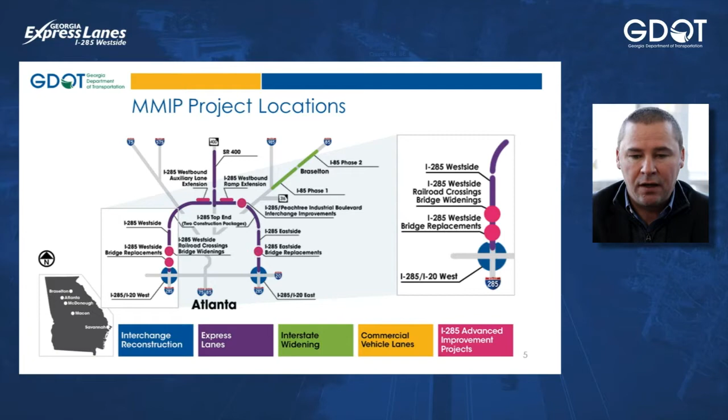Now, the Georgia Express Lanes are not unique to Georgia. We do have a history of those. Our first project, I-85, was opened several years ago, and we've opened several more in the past few years as well.

So the history started back in 2000 with our HOV system plan. We wanted to find ways to manage and mitigate congestion on our most congested corridors, and we thought the HOV system would work. But we found during that study that most folks still do not want to get out of their cars or carpool.

So what we did was move forward with a study on I-285 in 2006 that looked at alternatives, including transit, bus rapid transit, as well as general purpose widening and express lanes. And out of that, in 2007, the Atlanta Regional Commission, as well as the Georgia DOT Board, adopted express lanes as the strategy to mitigate congestion in the metro area.

We moved forward in 2009 with the Managed Lane System Plan that was adopted. That plan outlines the system we wanted to bring forward in the MMIP program. In 2011, we opened to traffic our first express lane on I-85. Now that's a HOT lane, as we call it, because we converted an HOV lane to express lanes. We're not doing that on I-285 or the other express lane projects.

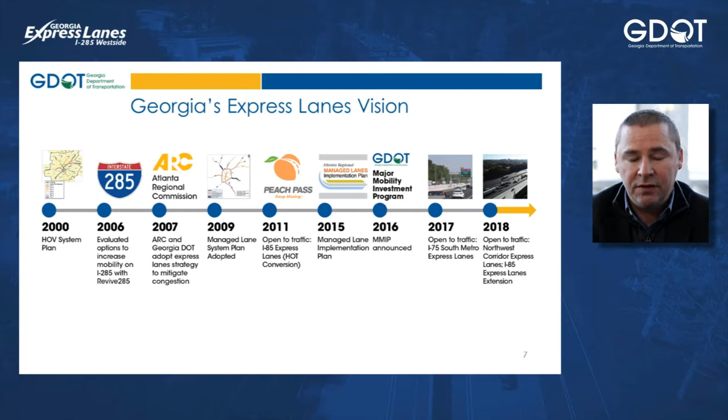In 2015, we brought forward the Managed Lane Implementation Plan, again setting the rules and policies for express lanes in Georgia. In 2016, then Governor Deal announced the Major Mobility Investment Program, which are the projects you saw on the previous few slides. In 2017, we opened the I-75 South Metro Express Lanes, and in 2018, we opened the I-85 Express Lane Extension, as well as the Northwest Corridor Express Lanes on 575 and 75 in Cobb and Cherokee County.

So some of the success we're going to build on from the Northwest Corridor project. Those of you who ride that corridor can see benefits on day one. Rush hour has been reduced by more than an hour, both morning and evening. We've had well over 10 million trips.

First year trips were 7.2 million. So people love the express lanes, to be honest with you. They want to use them because they get the reliable trip times they're looking for. Travel speeds are 20% faster in the express lanes than the general purpose lanes, and the average daily fare is about $2.32, which depends on the congestion or speeds in the express lanes.

The express bus service, day one, which is a transit service provider, saw great benefit. They actually were getting to their destinations about 15 minutes too early because they had reliable trip time, so they had to adjust their schedules so that they wouldn't arrive too early based on their scheduled timeframes.

But one thing we didn't realize when we were opening the Northwest Corridor Express Lane project is that the general purpose lanes actually received the benefit as well. The general purpose lane speeds are up by about 20 miles per hour, morning and afternoon. That's a huge benefit for folks who choose not to get into the express lanes.

Now you're still going to get faster travel speeds in the express lanes over general purpose lanes, but you do see a benefit on the GP lanes as well. So it's a great reward for everyone.

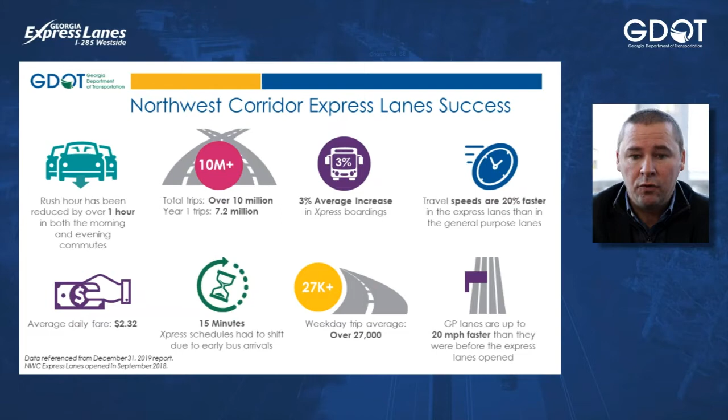How does it work? The express lanes work very simply: the more cars in the express lanes, the slower the speed and the higher the price. The toll increases when there's more congestion, more cars, and it decreases when there's less congestion. That is managed by SRTA, which we'll talk about later. With this type of pricing model, drivers experience more reliable trip times because we manage the demand in the corridor.

It is also a great benefit, as I mentioned a few minutes ago, for public transit, because public transit service providers do not have to pay to get into the express lane system, such as MARTA, Express Bus Service, CobbLinc, or Gwinnett's transit service providers.

Now you do have to pay to get into those services, but you do not have to pay a second charge to get into the express lanes. And those also include registered van pools and emergency vehicles. One thing to note is no trucks are allowed in the express lanes, giving us that benefit of reduced congestion.

Now, we don't do it alone here at GDOT. We have several partners that are key to bringing these projects and programs forward. We have what we call an integrated mobility solution partnership that includes GDOT, the ATL, and State Road and Tollway Authority.

GDOT's responsibilities are to get the project ready for construction, all that pre-letting activity, the procurement, bringing a developer on board, project management, operations such as the Traffic Management Center, the HERO units you see on the roadways, as well as maintaining the roadway, snow and ice, etc.

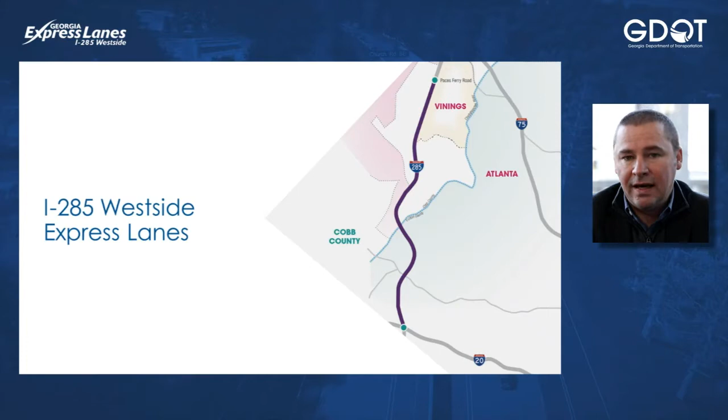We are also acquiring early right-of-way on the project, but our most important document that helps us move the project forward is the environmental document. We have to have that document and the studies involved approved before we can go to construction.

Following the project development phase are several steps such as construction, where the developer builds the project, operations, when we open it to traffic and you get the benefit of reliable trip times, tolling operations, etc., and then obviously maintenance of the roadway. So a lot goes on in the life of the project as we know it.

As you can see on the screen here, you get an idea of the project limits. On the right-hand side is I-285. You can see I-20 on the south side there, and I-75. The project starts at Donald Lee Hollowell Parkway and goes north with one express lane in each direction, all the way up to Paces Ferry.

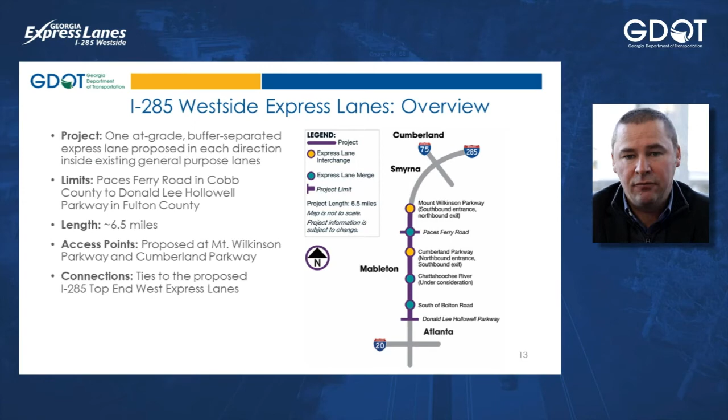So thereby you get the same number of lanes for general purpose users, but you do get the added express lanes for folks who choose to get into the system. And this highlights what that would look like.

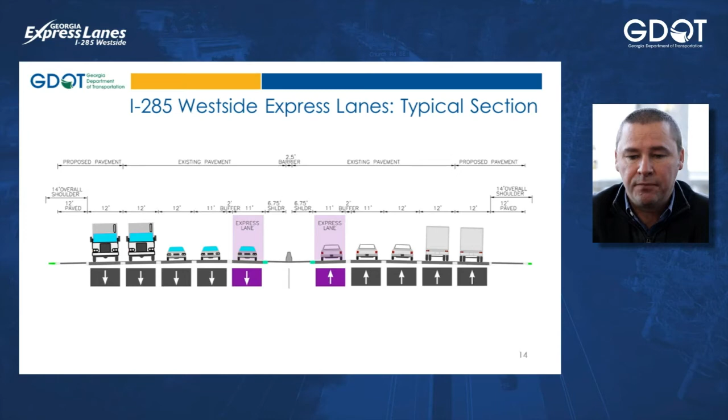So what is the main purpose of the project? Obviously, our goal for MMIP and the express lanes is to provide reliable trip times for users who choose to get into the system, as well as transit service providers. It also improves regional connectivity. As I mentioned, this will be a complete connected system on 285, 75, 85, and 400. So you'll see that regional connectivity and the improvement it brings to the metro area.

And the way we're doing this is through what we call accelerated project delivery, or design build finance, and design build finance maintain type delivery methods. This allows us to bring the project forward, get it open to traffic, and see the benefits earlier versus waiting 10, 15, 20 years down the line to get that project open.

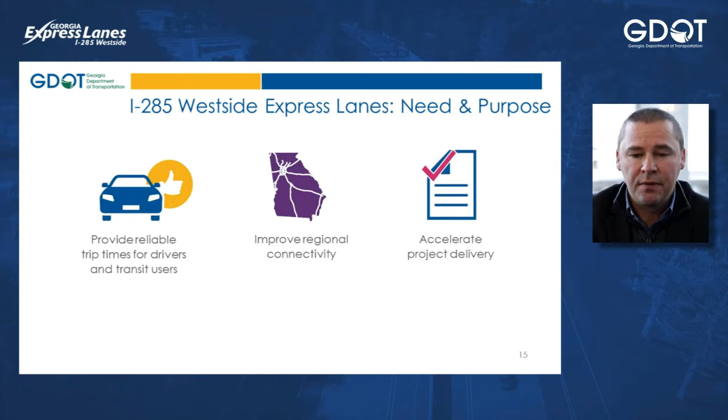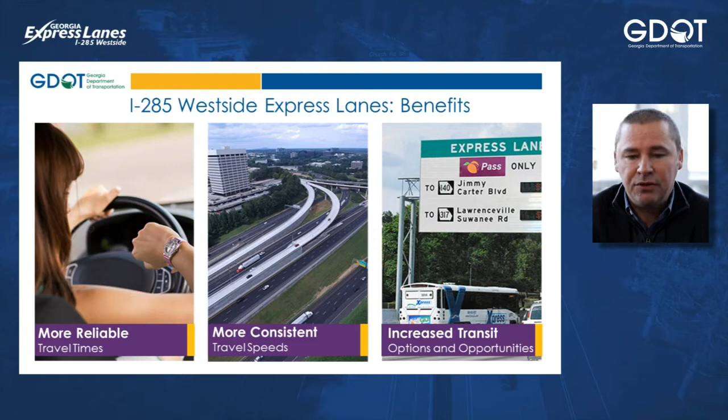Here's some more benefits, just highlighting what these express lanes bring: reliable trip times, consistent travel speeds, and increased transit options and opportunities, such as the express bus service and CobbLinc and the like.

But that's not all of the public information outreach that we do. We're going to do continuous outreach with you, the stakeholders, cities, counties, CIDs, and the like, to again make those decisions we need on the project.

Starting in Q1 of 2022, we'll have a public hearing open house, very similar to what we're having here, hopefully in person by then. That's where you have the environmental draft document on hand so you can see what's going on with the studies. We expect approval of the environmental document in Q4, or late 2022, getting the procurement or bringing a developer on board in 2023, with construction starting in 2026 and open to traffic in 2032.

So a lot more to do, but starting here this evening, we look for that feedback from you today.

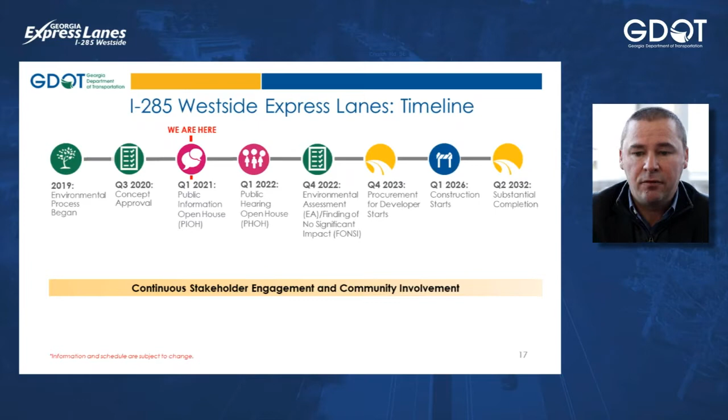Now, we design these projects looking at today's traffic numbers, and we project those out 20 years to get an understanding based on the open to traffic date. So open to traffic in 2032, forecast that out 20 years from then, gives us a 2052 forecast of 258,000 vehicles. All the while, we believe these express lanes are going to give you that additional 15 minutes of average daily travel time savings on this 8-mile trip.

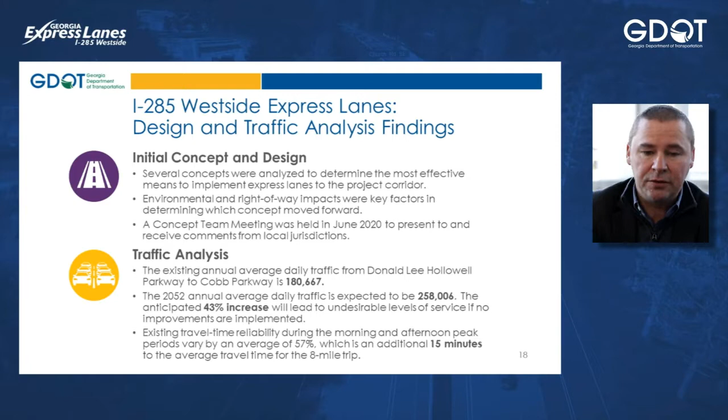The environmental process and analysis that goes into that, we follow the National Environmental Policy Act, called the NEPA process. That's the document I mentioned earlier that we have to get approved before we can go to construction. It determines how the project should be developed for public use. It really outlines, based on the impacts this project brings and the benefits it brings, quite frankly, how we set the course for getting this project to construction and open to traffic.

The environmental impacts are factored into the design and the decisions we make on the project, not only in pre-let, but also after in construction as well. And we conduct public meetings to allow the general public and stakeholders to provide those comments we need to make those decisions I mentioned earlier.

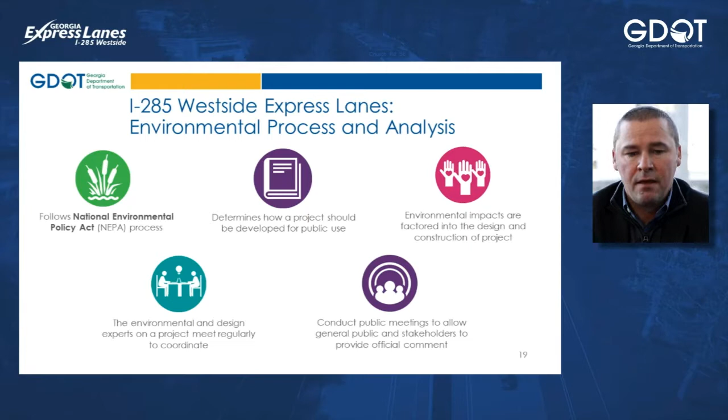The environmental approval process involves several studies that are looked at, including ecology, history, and archaeology, just to name a few. It also includes public involvement, hearing from the public and stakeholders on the corridor about impacts, and identifying key resources along the corridor such as waters of the US, wetlands, and streams.

Not every project is clean. We have to look at the impacts, and sometimes we need a little bit of right of way, and sometimes we need the whole parcel, which may cause a displacement. There's a pretty in-depth process for right of way acquisition that we'll talk about later. There are also utility conflicts, such as natural gas pipelines near Atlanta Road, that we have to deal with, among many other things, all while bringing the National Environmental Policy Act, or NEPA, document forward to approval, which gets us to construction.

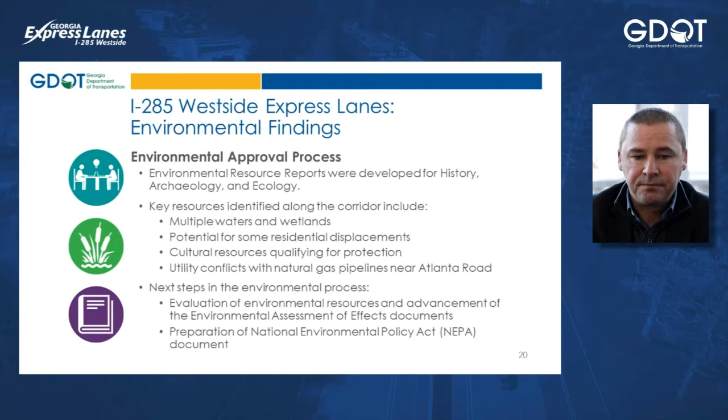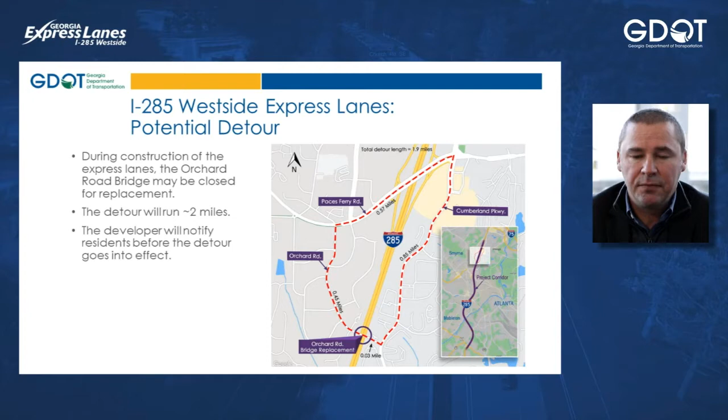We've also identified during the concept development phase that there's a need for a detour. The best way to replace a bridge over a busy interstate is to get it done as quickly as possible. So we believe if we close Orchard Road and replace that bridge with a detour, we're able to get in and out quickly, reducing impact to the traveling public. What we're presenting here is the detour: as we close Orchard Road, you'll still be able to access across 285 using Cumberland Parkway, Paces Ferry Road, and Orchard Road itself. It's about a 2-mile detour, which isn't significant, but it helps us get the project moving faster and get that bridge replaced as quickly as possible.

As I mentioned earlier, there are several advanced improvement projects that are really a small piece of the bigger express lane project. We're going to bring those forward early and get them open to traffic because they help with maintenance of traffic during construction and ease the burden during that period. What you see highlighted in the red boxes are the projects we're bringing forward early: a series of bridges over 285, including a CSX Railroad and Norfolk Southern Railroad bridge, as well as South Cobb Drive Bridge, Bolton Road, and DL Hollowell Parkway over 285. These are all bridges we'll replace as part of the advanced improvement project, done early before the bigger project comes forward.

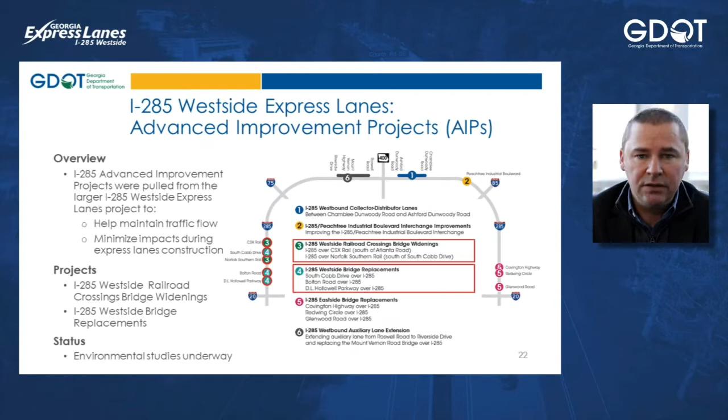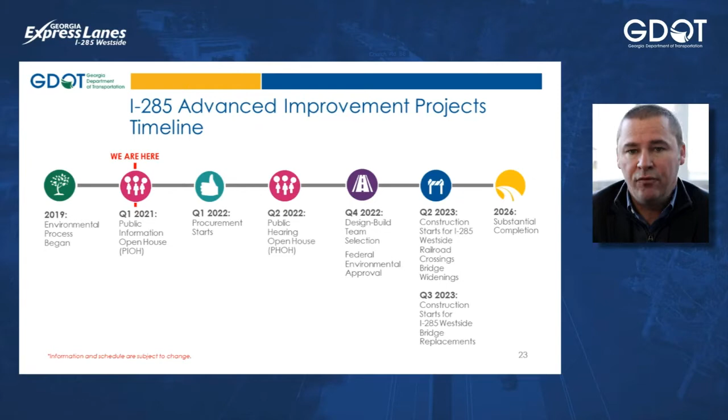The environmental studies are underway on these projects, and we expect procurement to start in the next year or so. Here's the schedule: in 2021, as part of this project, we're bringing to the public what we're doing on the advanced improvement project so we can get feedback. Procurement starts in the first quarter of next year. We'll have a public hearing open house next year, bringing this project procurement forward with environmental approval in late 2022, construction starting in 2023 for each of the projects, and ending in 2026. So those projects will be open to traffic before we get started on the bigger express lane project.

Public stakeholder involvement is what we're here for this evening, to get feedback from you. We've had several virtual public information open houses last year with State Route 400, and also with the I-285, I-20 interchange on the east side. Similar to that, we're following the program's footsteps, moving forward with virtual settings like this. We've also held some in-person, limited public hearing open house forums, socially distanced, of course. Hopefully this time next year, we'll be able to come back together in person.

The public information open house website is a website we developed where you can get all the information we have available to date in front of you, so you can see what's going on with the project, how it may impact you, how it will benefit you, and hopefully answer some of the questions you may have along the process.

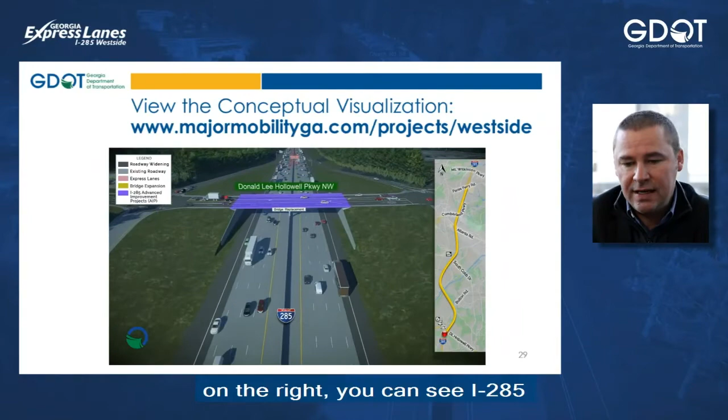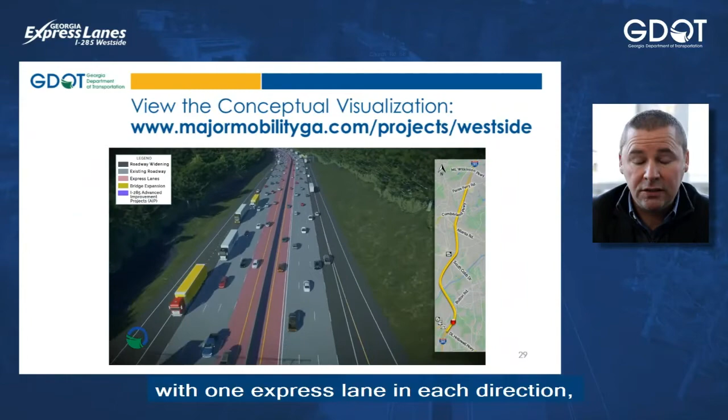This is obviously not the final layout, just a general concept as we know it today. Starting from south to north on the right, you can see I-285 and Donald Lee Hollowell Parkway. The express lanes start here in fuchsia, in the center, with one express lane in each direction, and we'll travel north with you as I explain what's going on along the corridor.

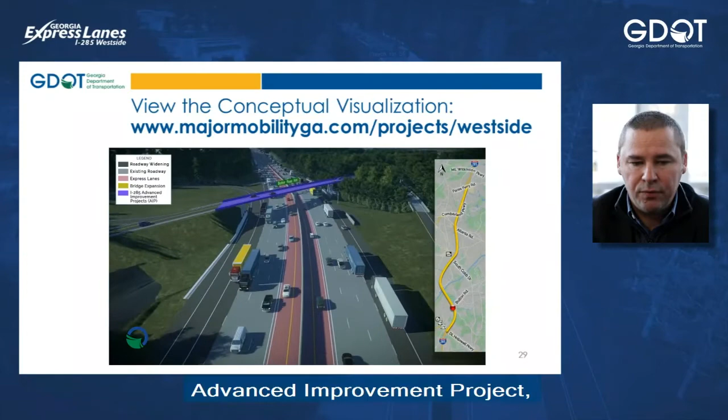Here we're starting to approach our first advanced improvement project, which is the Bolton Road Bridge replacement. This bridge has to be replaced to fit the express lanes underneath.

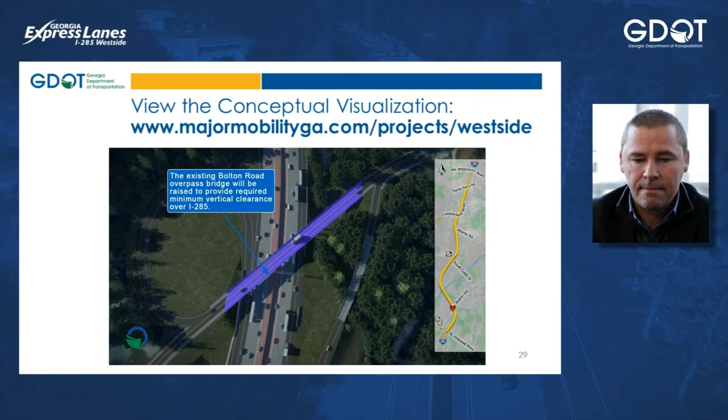Continuing north on I-285, you can see several bridge widenings. Here's the Chattahoochee River Bridge widening.

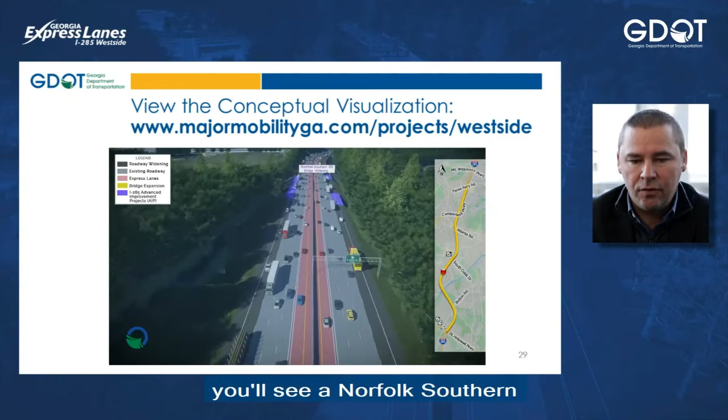Continuing north, approaching South Cobb Drive, you'll see a Norfolk Southern Railroad bridge widening here. This is where I-285 is over Norfolk Southern Railroad.

Approaching South Cobb Drive, again this bridge has to be replaced because express lanes will not fit underneath.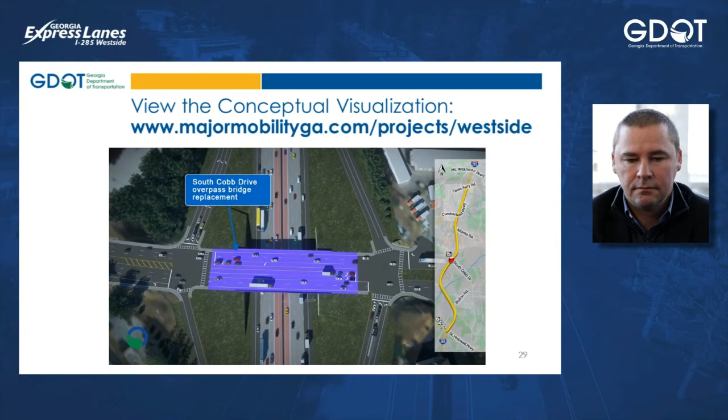Traveling north on 285, you'll see another bridge widening on 285 over Church Road.

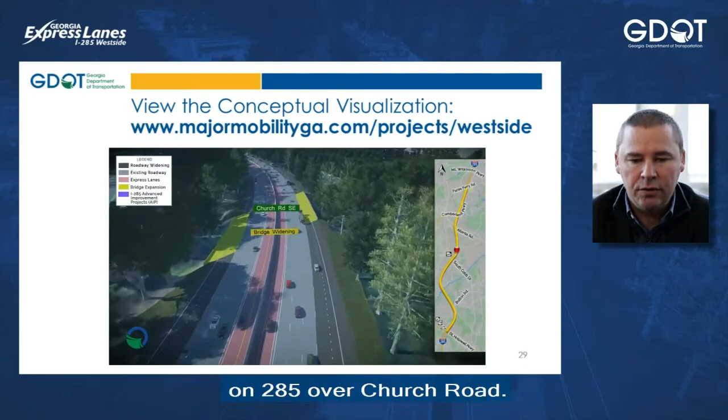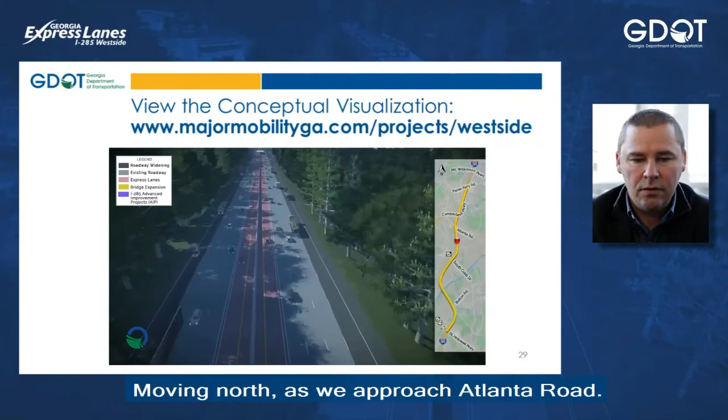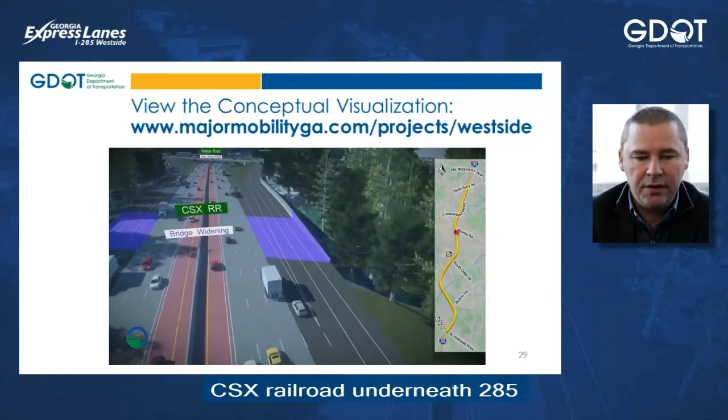Moving north as we approach Atlanta Road, here's CSX Railroad underneath 285, and here's Atlanta Road. We're going to retain this bridge; it does not need to be replaced.

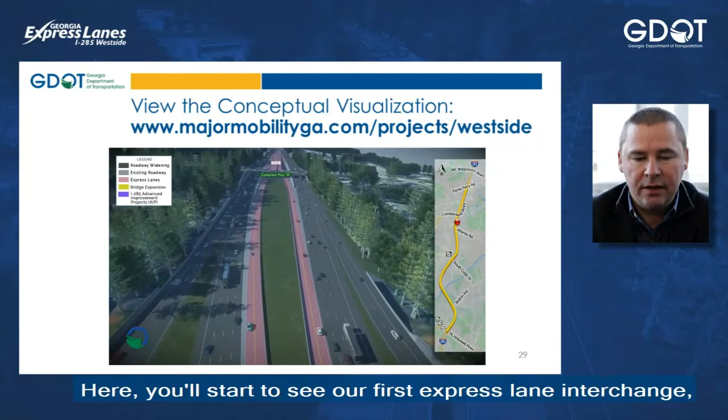Here you'll start to see our first express lane interchange, or access point, at Cumberland Parkway. This is north-facing ramps only, so you can access the express lanes going north and travel south to Cumberland Parkway.

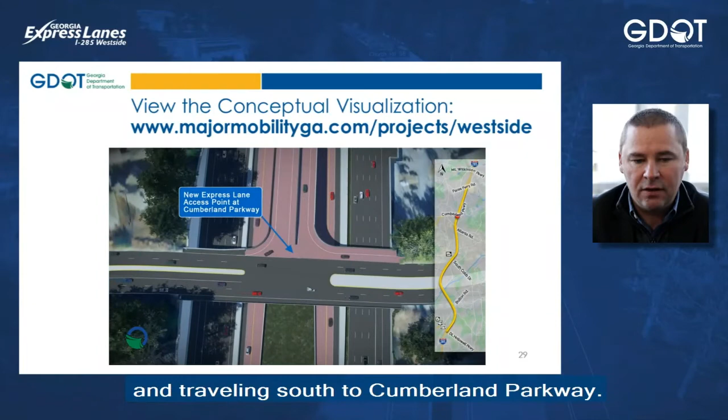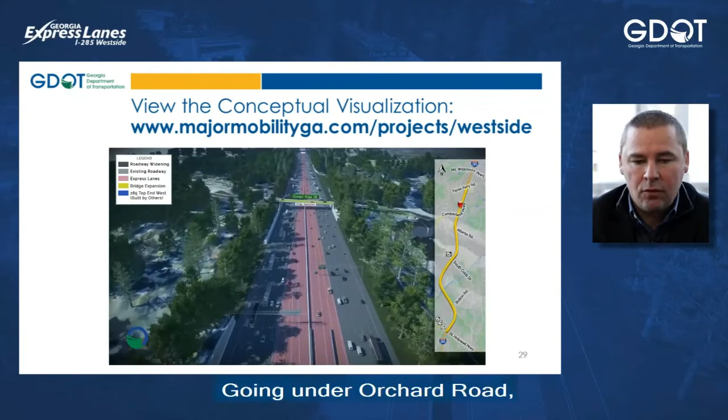This is express lane access only, so there's no general purpose access to 285 here. Traveling north, you can see the ramps down from the access point tying you back into 285 express lanes, going under Orchard Road, which is a bridge replacement.

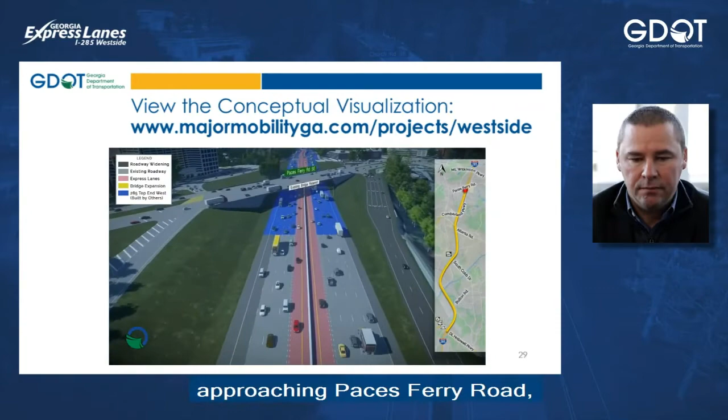Approaching Paces Ferry Road, this bridge is retained. We do not have to replace that bridge.

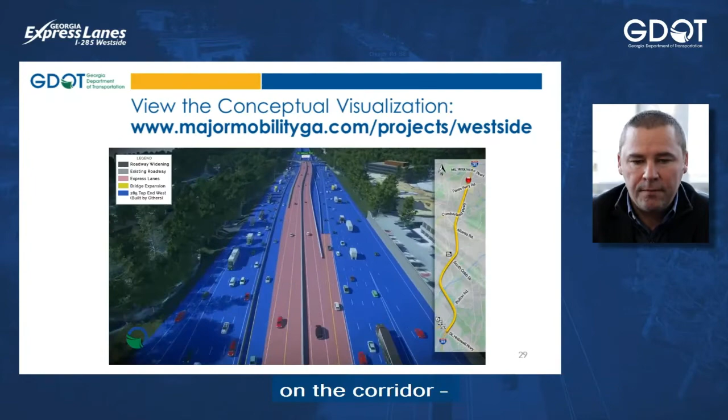Moving north to our next access point or interchange on the corridor, you can see this access point takes you up to Mount Wilkinson Parkway. We're able to enter the express lanes going south and travel north to Mount Wilkinson Parkway. Again, this is an express lane only interchange; no general purpose traffic can enter the 285 corridor from here.

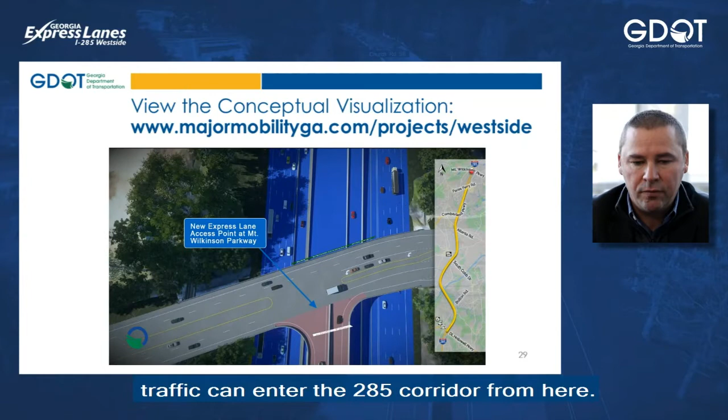And that concludes the video.

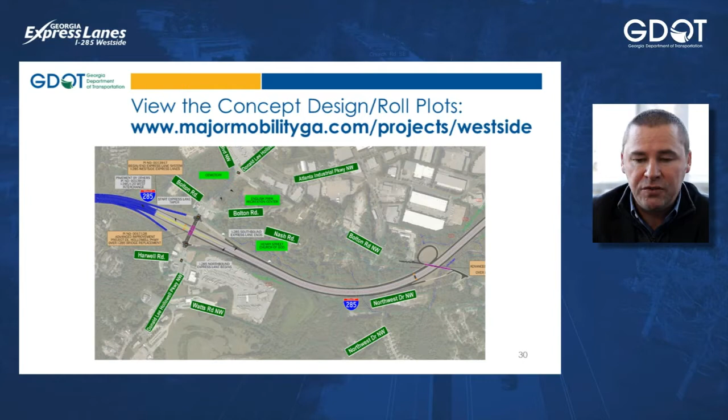You can also look at roll plots or concept drawings on our website, again at that same website I mentioned earlier, majormobilityga.com/projects/westside. You'll be able to see a layout like you see on the screen here, and the whole entire corridor if you go to that website moving forward.

We also have several other things on the website that you can view. We have a welcome video from our GDOT spokesperson, Natalie Dale, that tees up the website and what you'll be able to see and what this project's about.

We also are able to translate to any language on the website. So if you need a different language other than English, you'll be able to click a button called Translate, and that will translate the website into whatever language you're looking for.

There are many virtual rooms, as we're calling them, for the environmental process, such as air and noise impacts, maps, facts, and many other documentation that we have available today. We also have information on the advanced improvement projects, those bridges I was talking about earlier, including detours and layouts.

We also have a room, or a video, where you can learn more about the right-of-way acquisition process. If you see that your property is impacted by the project, this video and information on that site will help you understand what the process is for acquisition or purchasing of right-of-way.

Most importantly, what we have on the website and what you'll find today is access to that comment sheet, where we're looking for comments from you. That information helps us make the best decision possible on these projects.

You'll see the roll plots, the handouts, fact sheets, and comment cards. You can electronically submit those comment cards and view the fact sheets, or you can mail them back in if you choose to fill it out at a later date.

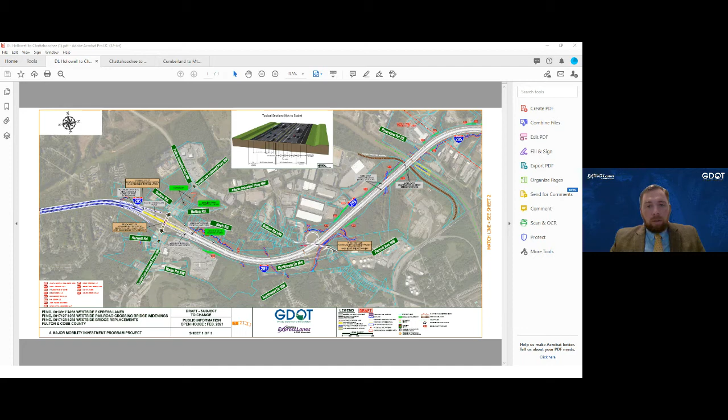Okay, I see it now. From DL Hollowell, which is the interchange on the left side of the layout here, the closest access point we're currently proposing to the express lanes is just south of the Chattahoochee River, which you can see on the right side of the layout. That's probably about 1.5 miles from the DL Hollowell interchange. So you'd enter from DL Hollowell, merge across the general purpose lanes, and there's a direct merge—basically a skip stripe—that gives travelers the opportunity to get from the GP lanes into the express lanes or vice versa. Going northbound, that's your opportunity to enter the express lane system. If you're coming southbound in the express lane system, there's also that same direct merge right at the Chattahoochee River, so you'd exit the express lane system and merge across the general purpose lanes to access DL Hollowell. Thank you.

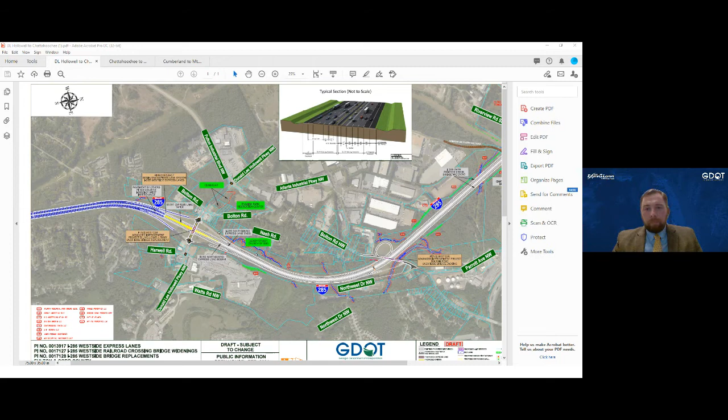Will this project impact or improve I-285 southbound access to I-20 West, which is the biggest bottleneck on the Westside? Tim, thanks, excellent question.

As you can see, we've demonstrated the express lane project actually stops just north of I-20. However, as part of this major mobility investment program, we have an interchange and reconstruction project underway in the early concept phase that will reconstruct I-20 and I-285 at that location. You're going to see new ramp configurations. One of the biggest problems in that area is vehicles traveling south on 285 to west on 20. There's a pretty big steep grade there on that ramp, and trucks don't like steep grades, so we're trying to correct some of those things.

We're also doing some work on I-20 proper with collector distributor lanes, basically giving access to the interchanges and access points past the interchange, a dedicated lane so you don't have to mix with general purpose through traffic. That's a separate project in concept development right now, and will be under construction about the same time as this project, or just before. Actually, it'll be done just before the express lane project, so it's a separate project to fix that congestion area as well.

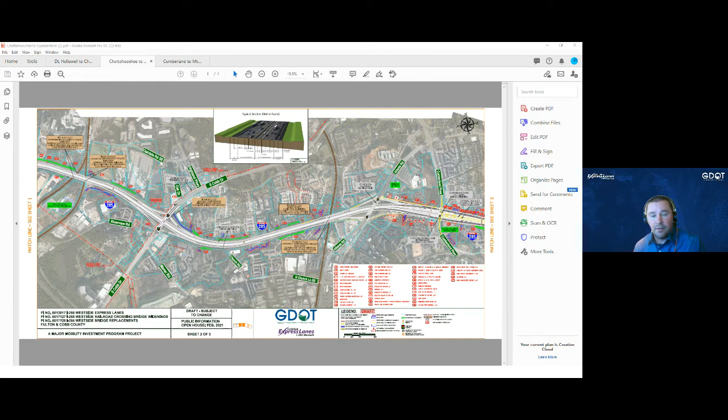So stay tuned, stay engaged, and keep track of the project on this website. You'll be able to see as the project advances exactly what the needs are from a right-of-way perspective. Once we determine that you are impacted, whether it's just a couple feet of right-of-way that's needed, or the whole property is needed, we'll let you know, and you will be communicated with.

Ultimately, as Phil mentioned earlier, through the right-of-way acquisition process, if we need property, we will reach out to you and start that process. Just like a normal real estate transaction, we would make an offer for that property that's needed, whether it's a little bit or the whole property. That process will begin once we're prepared to do so. But right now it's early, so stay tuned, and we'll help you understand the process, especially if you're impacted from a right-of-way perspective moving forward.

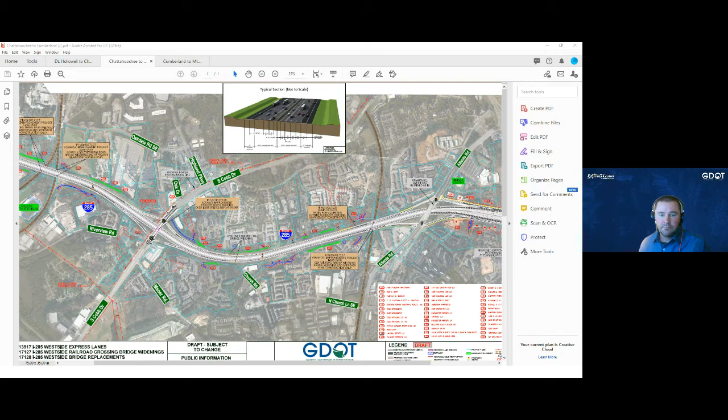Is there enough space along the Orchard Gate subdivision to keep the current sound barrier using a retaining wall, and thus avoid taking any backyard properties?

Sure. It's definitely, anytime we can mitigate impacts to property that we don't currently own as a department, we're going to try to do that. Sometimes the cost of a wall is a lot more expensive than 2, 3, or 5 feet of right of way, but we have to do an assessment to understand what the impact is and what the potential solutions may be. That's all through the design process.

As we move forward, if we find that we can build a wall here because we can stay off a residential property and it's relatively cost effective, that's the solution we may go with. But the reason we have these meetings this evening is to get that feedback, to understand what the impacts are to you as citizens and homeowners on these corridors, and ultimately take that back and evaluate it in the environmental process, but also in the design process.

We have lots of engineers working on that. Ryan, who you heard from earlier, is our lead engineer on this project. He takes that information and does an analysis to determine what the best solution is to try to avoid impacts—that's our first goal. In the environmental process, if we can avoid it, that's what we're going to do. But to the extent we cannot avoid impacts to property we don't own, then we have to go through the evaluation process, both environmentally, design and engineering wise, as well as right of way wise.

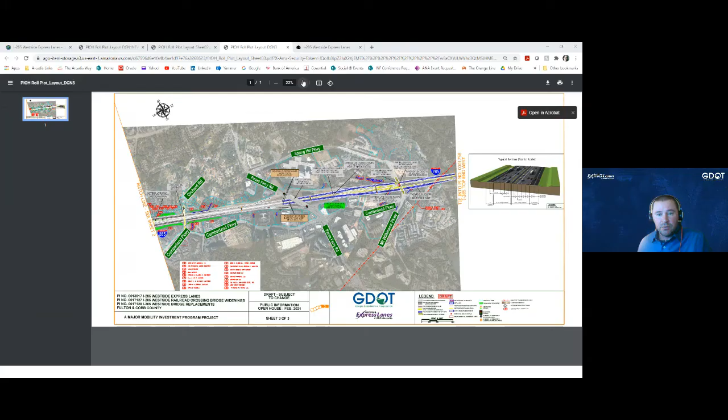Sure. So obviously, we don't identify every single parcel along the corridor because some are far enough off of the interstate and the potential need for the project design that we don't identify those. It may be in the future that we may have to identify it, it just depends on where the location of that property is. I'll let Ryan, if he has an indication of what that may look like here in this case, but just because we haven't labeled it doesn't mean you're not necessarily impacted. But we do recognize if there's a potential impact, we definitely want to recognize those properties and we label them accordingly. So if you're not labeled today, then that means there's probably not an identified potential impact necessary for this project.

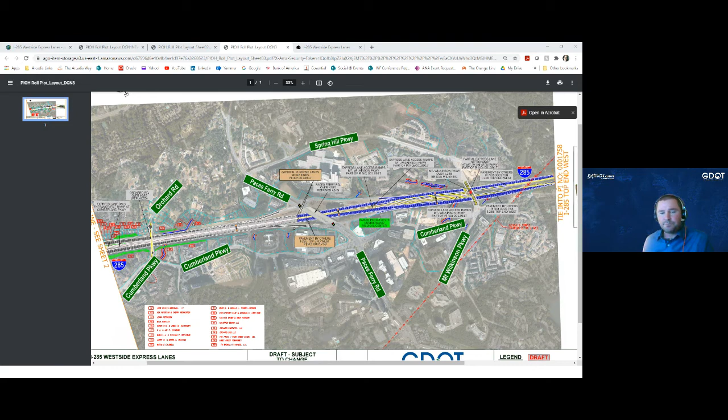But Ryan, do you want to add any more to that? Sure, Tim. I'm actually going to share my screen because I have a layout that's probably a little more detailed than what is, let's see, screen one. So I know there's been a lot of questions on the Orchard Gate subdivision, which is right here off of just off of Orchard Road, immediately adjacent to 285.

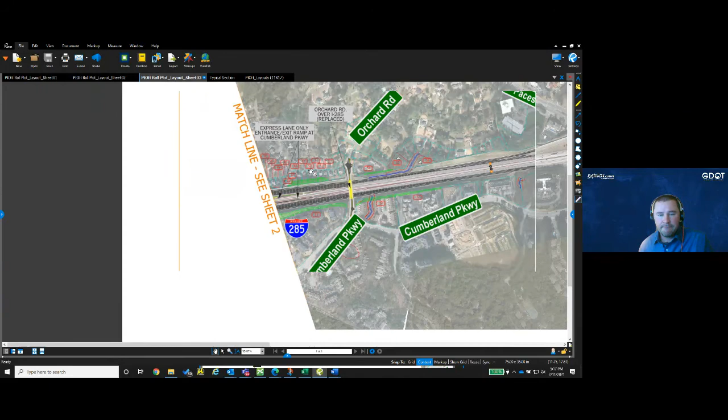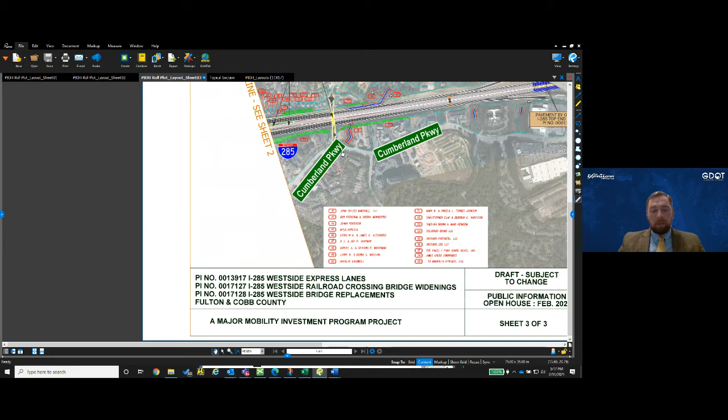So here on the project layouts, we have a number of parcels and property owners. They have numbers and the owners that we have listed for those properties. If your name is shown here, it means that based on our concept design, and this is still very, very preliminary, we indicate that we may need some property, either required right of way, which is purchasing the property from the property owner, or construction easement, or permanent easement sometimes.

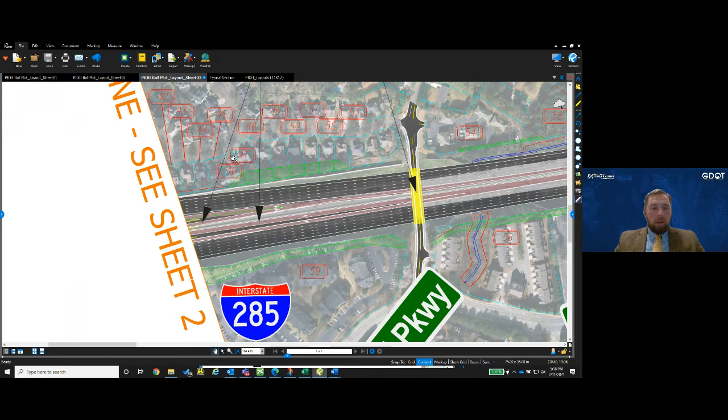So the green here is what we consider permanent easement. And so the property in that case, it's still owned by the property owner, but GDOT purchases the right to access that property, which can be done just for construction, maintenance of slopes. It could be something to do with drainage, or any number of items that the DOT may need to get back in there and do something in that area. And so they purchase the right to access that, but don't actually take control of the property from the owner. This red line here, and I may switch to a different sheet for this neighborhood, which may show a little bit more information.

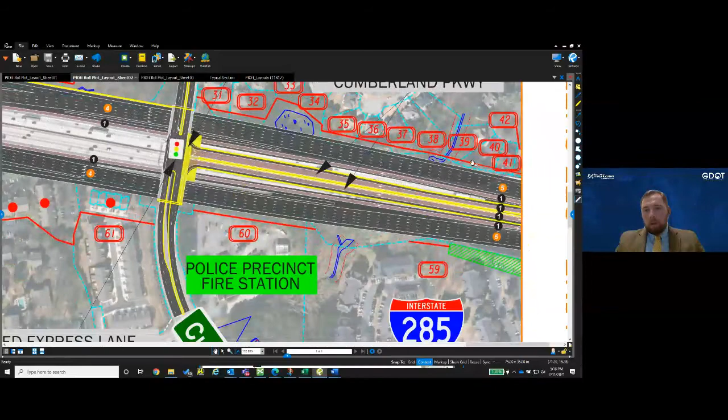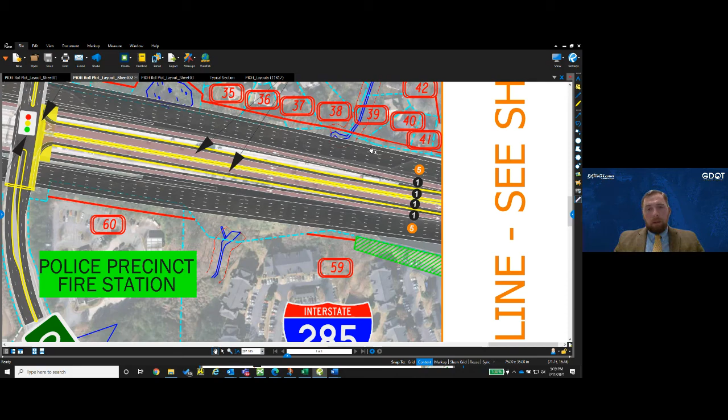So the red line here would indicate what we think we may need as right-of-way, which is actually purchasing property from the homeowner sort of permanently. So the homeowner wouldn't own it anymore. The Georgia DOT would consider that their right-of-way. And then on these layouts, that's the difference - when you're looking at these, the red line indicates what DOT may purchase, the green indicates what the DOT may acquire access to.

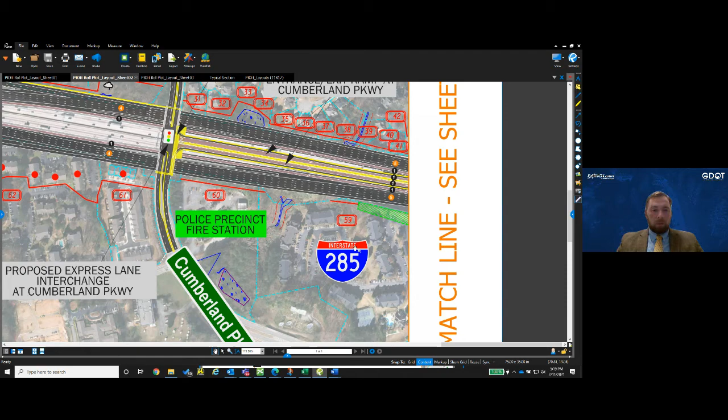And then you'll sometimes see these little red dots, and those are listed as potential relocations. So those are locations where we feel like the impact may be to the structure itself, or maybe the impacts are something that would no longer deem that structure to be usable. Sometimes that's things as simple as no longer having access or circulation around the property. And so that's what those red dots are.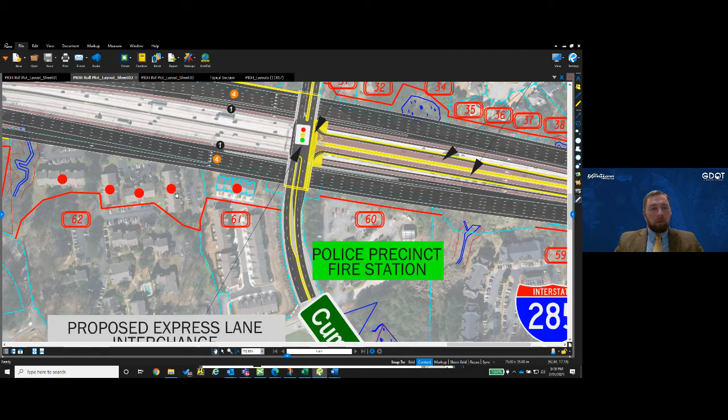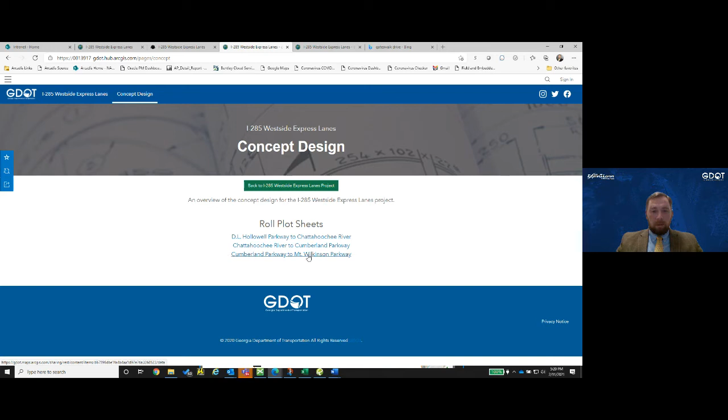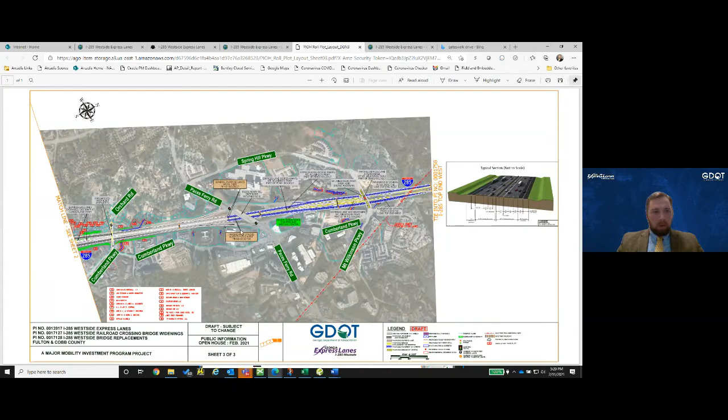And all of those layouts are on the website. Actually, I can show you where you can get to them since there's been a number of questions. So this is the website, and there's a little link right up here at the top called Concept Design in the banner. And that will bring you to this page, and each one of those layouts are located here. So you can click that and it will load that drawing that I was just sharing. The resolution, unfortunately, because it's online, isn't quite as good as what I'm able to pull up since we created these, but this is the exact same drawing I was just showing you, and it's actually pretty good.

So that's what those items are. And just to reiterate, this is early in the design. We're going through concept and our preliminary design right now. So these are likely to change as we refine the design in these areas. Thank you.

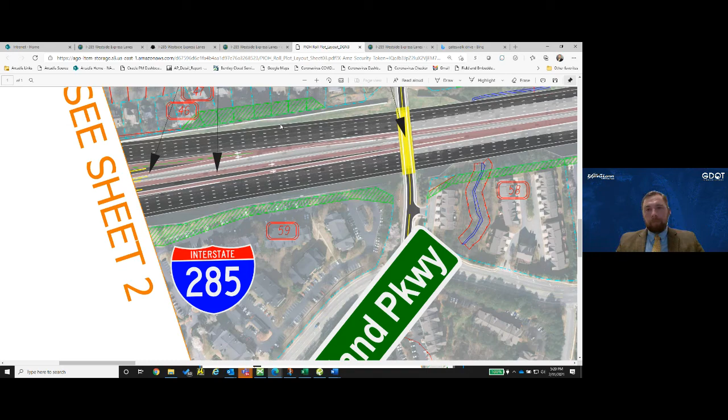Following up to my earlier question, in other places like Northern Virginia, express lanes were added to highways, which are managed and tolled lanes, just like this concept, with the ability for HOV vehicles to use these lanes for free. This HOV option promotes carpooling and rewards those carpools by allowing them to ride in the lane for free. Are you familiar with those types of managed systems, and were similar concepts considered in the planning phase?

Tim? Yeah, so trying to get off mute there.

So when it comes to allowing HOV users in the system, it goes back to my earlier point that it turns into a HOT lane facility. And what we're finding is you get results at certain times of the day on a HOT facility, but during our most peak travel times, you do not get results in a HOT type facility, especially with corridors like these where the demand is so high. So we would not want to put HOV allowed vehicles in the system, because it ends up being that HOT 3+, which is a vehicle that has 3 or more people in it, can get in the system for free. Because I said earlier, we can't control that number of vehicles that get in if they have those numbers in their car.